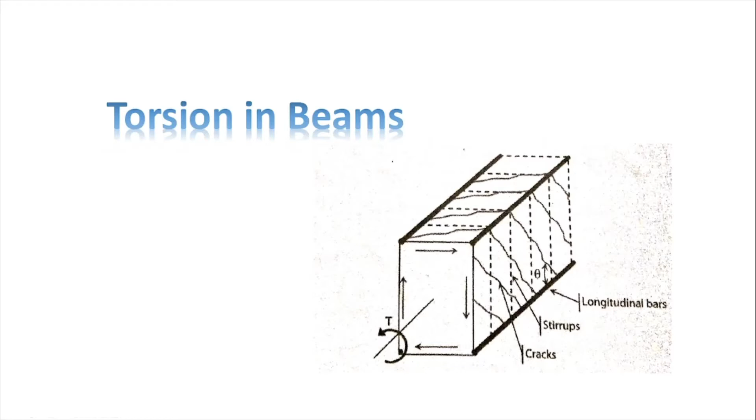So the analysis will differ with respect to each type of moment. Now our concern is the torsional moment. So how do we design the beam to resist that kind of load or moment? But first, what actually causes torsional moment?

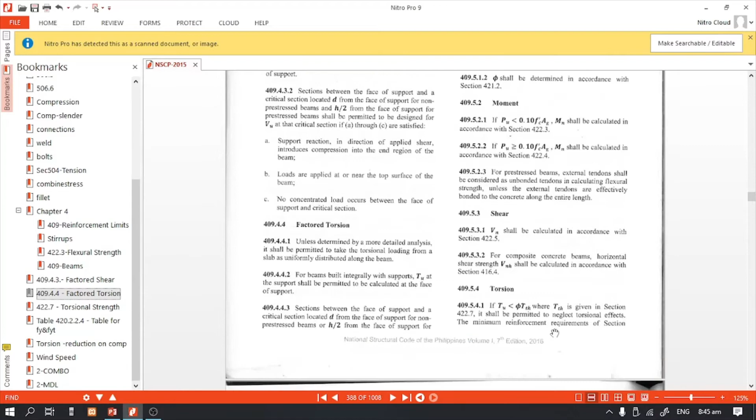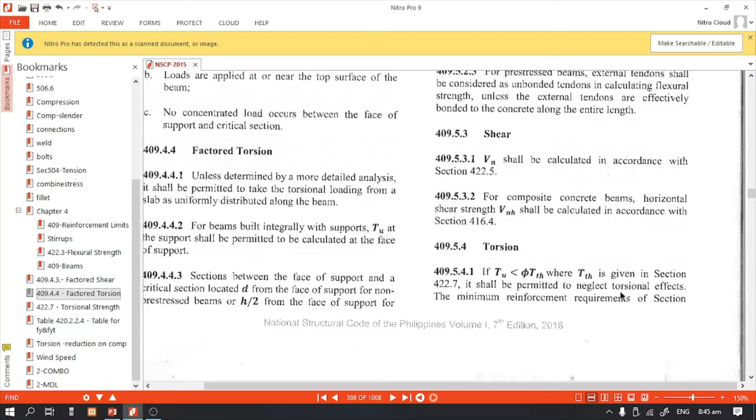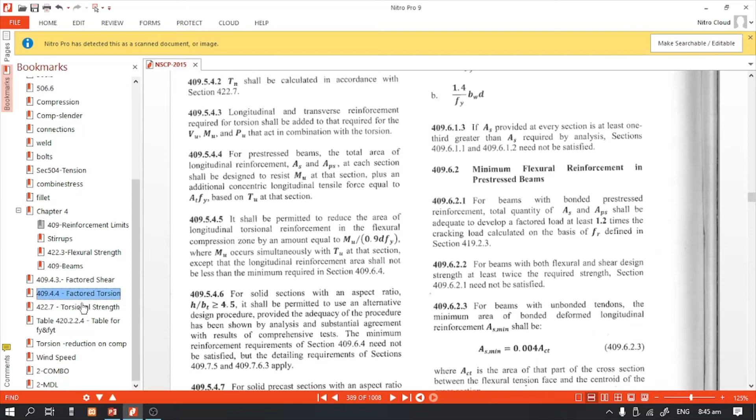So what's in the yellow box? According to the NSCP, if our torsion is less than phi T sub TH, it shall be permitted to neglect torsional effects. So what is T sub TH? It's the threshold torsion, TTH.

So for non-prestressed members, this is the formula: 0.083 lambda square root of f prime c, times A sub cp squared divided by p. If you notice, the difference here is the use of 1 over 12. Our 1 over 12 is also equivalent to 0.083, so to be more precise, let's just use 1 over 12.

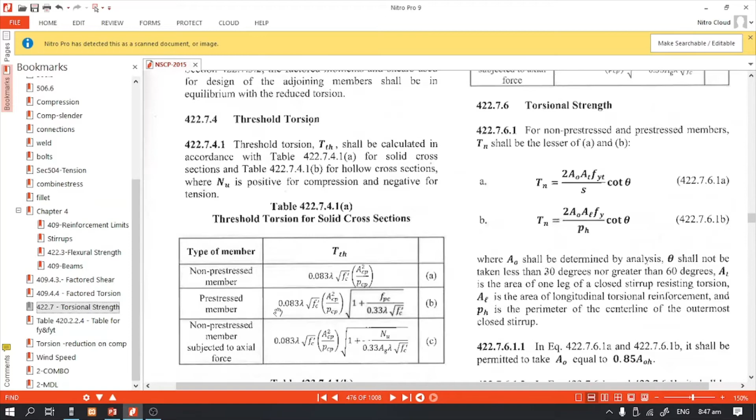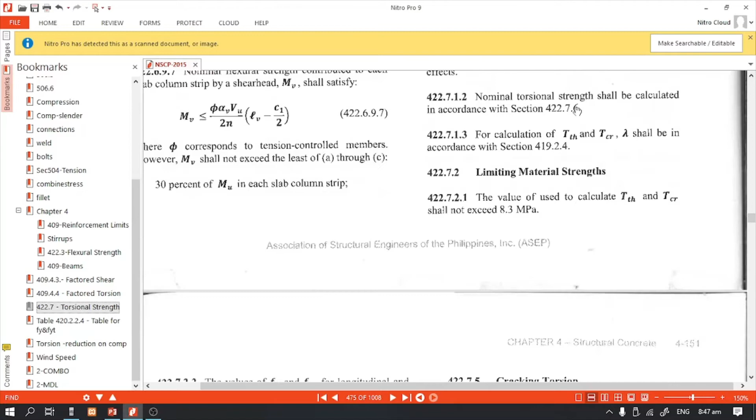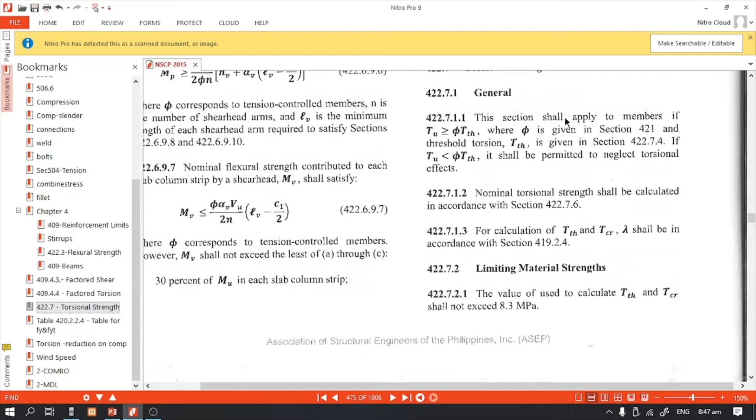So that's why we simplified the equation like this. According to NSCP, based on section 422.7.1, if we compare it to the value of the threshold torsion, if it's less than that, it shall be permitted to neglect torsional effects. But if it's greater than that value, then this section shall apply to the design of the member. That's shown in the diagram.

So if it's less than 1/12 of this term, torsion reinforcement is not necessary.

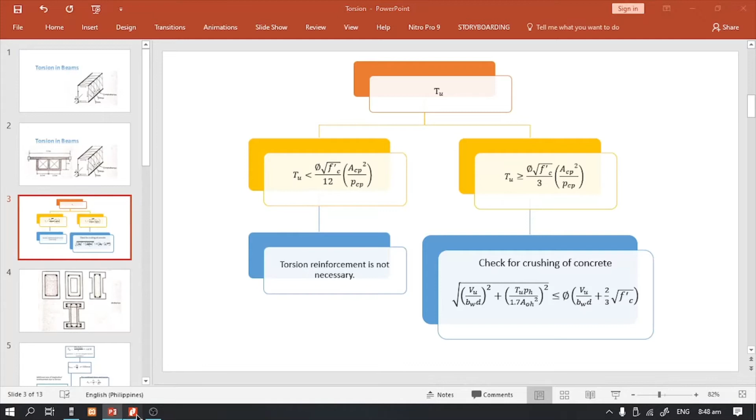Now when it comes to our design, we have another parameter, which is phi multiplied by T sub CR. T sub CR is what we call the cracking torsion. This value is what we'll base our design on.

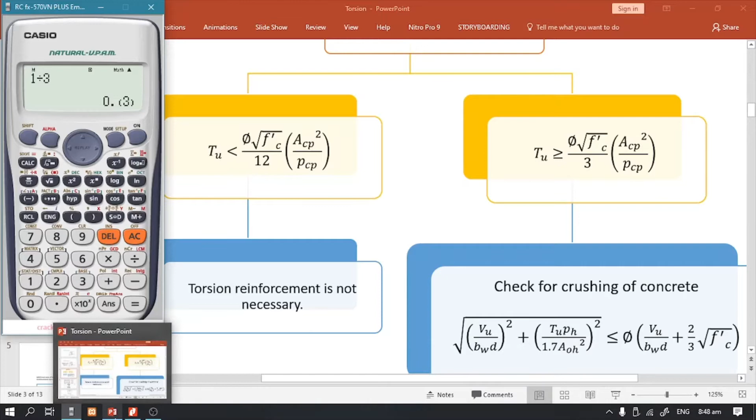If it's greater than phi multiplied by T sub CR, and TU is required to maintain equilibrium, and the member shall be designed to resist T sub U. So if the value of TU is larger than that, we need to design it for torsion.

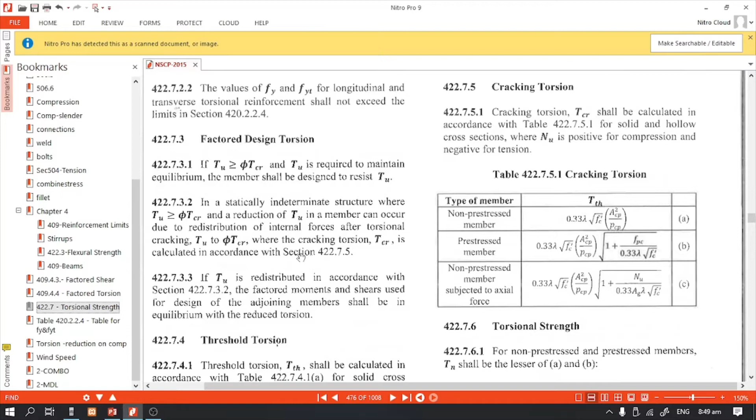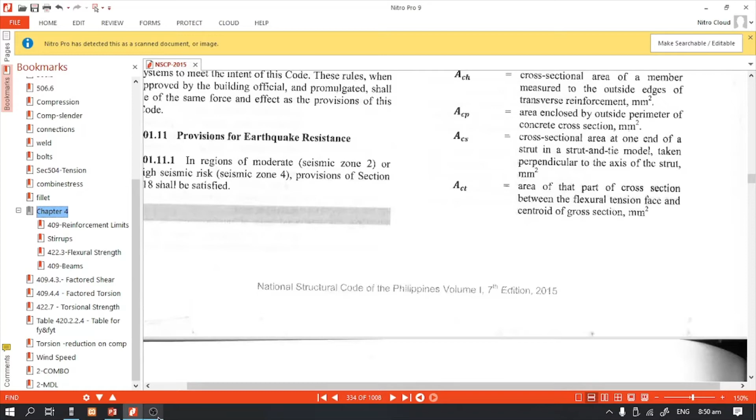So let's proceed to the formulas. What are the new notations here? A sub CP, as defined in the NSCP, A sub CP is the area enclosed by the outside perimeter of the concrete cross section. If we examine this, our A sub CP is basically the gross cross section, that is BW times H, our overall depth.

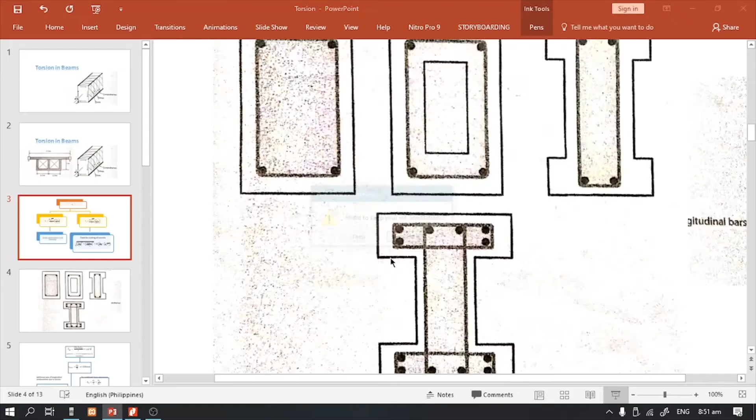So yung PCP naman natin is the perimeter, at yung ACP is the area. So halimbawa, na-compute natin na yung value ng Tu natin ay greater than the value ng TCR.

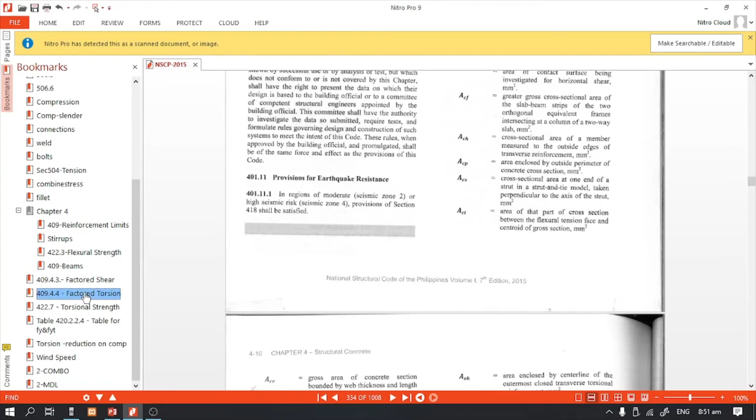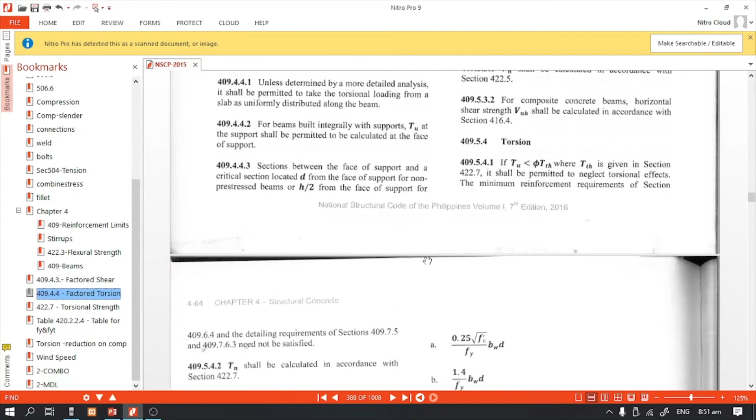Anong unang gagawin natin? Check for crushing of concrete. Sabi kasi dito ni NSCP, bago natin i-design yung member natin for torsion, kailangan nating i-check yung capacity ng section natin. So may limiting values dito.

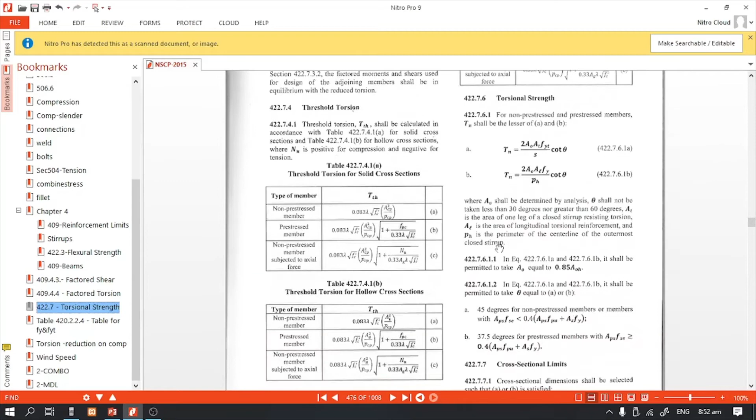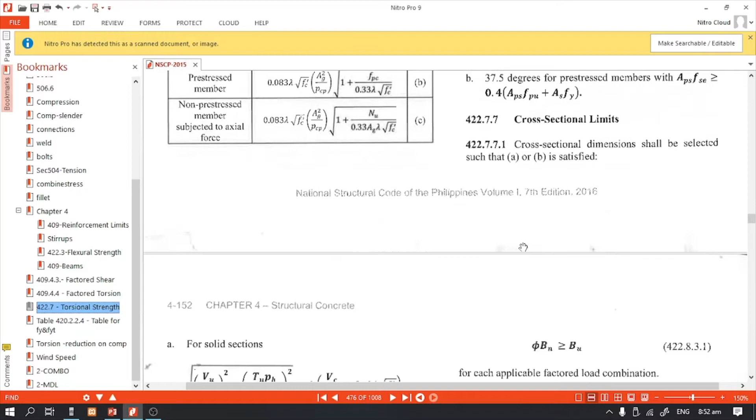Sabi dito sa section 422.7.7, dito papasok yung cross-sectional limit. Kapag nasatisfy niya itong condition na ito, saka lang tayo pwede mag-proceed sa pagde-design ng torsion.

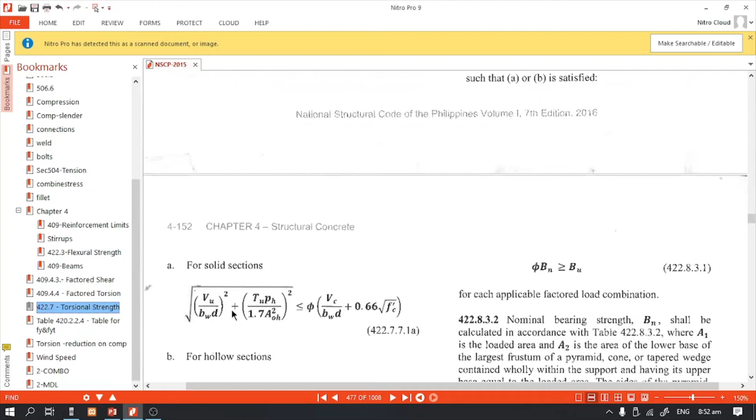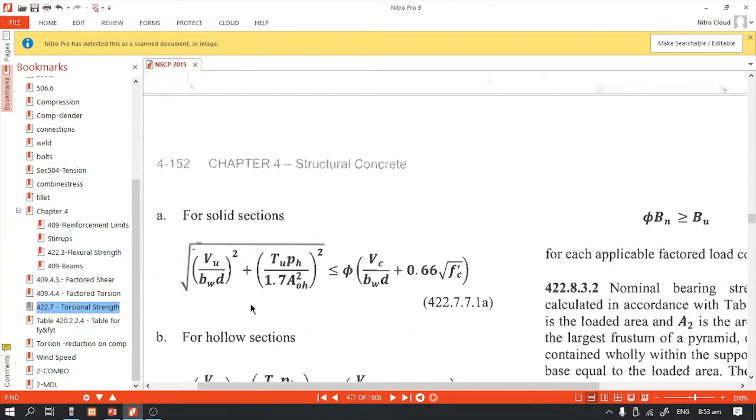However, kapag hindi na-satisfy itong condition na ito, possible na magkaroon ng crushing of concrete. Na kahit dinesign mo siya, meron siyang torsional reinforcement, pero ang bibigay na mismo is si concrete. Kahit mag-provide ka ng mga bakal, kung ang unang bumigay ay si concrete, walang saysay yung mga bakal mo. Para maiwasan iyon, kailangan i-check niyo muna yung section niyo kung enough ba.

So ito yung gagamitin nating formula to check for the crushing of concrete. VU is the factored shear, ito yung dati nating ginagamit—kung ilan yung value ng shear natin at critical section.

Yung TU pala natin, saan nga ba siya kinukuha? Kung babalikan natin dito sa NSCP, same lang siya ng pagkuha ng VU. Sabi dito, for beams built integrally with supports, TU at the support shall be permitted to be calculated at the face of support. Same ito sa VU natin. Kapag naman yung section natin ay between the face of the support and the critical section located D from the face of support, for non-prestressed members.

Kapag hindi siya built integrally, yung beam natin, yung critical section natin ay located at a D distance from the face of support. So same lang siya ng location ng sa VU.

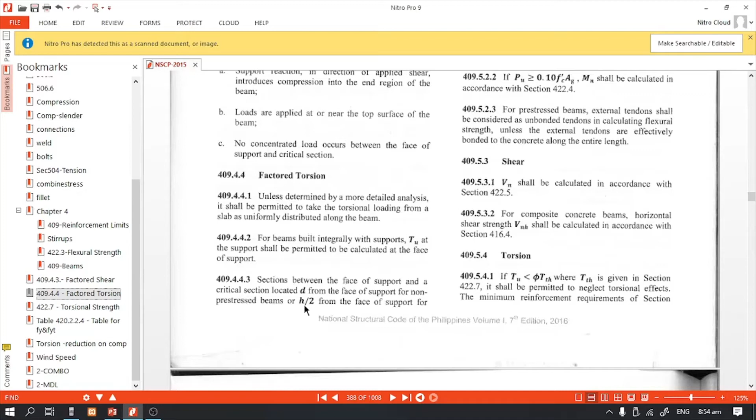Balik tayo dito sa formula: TU, and then P sub H at A sub OH. Ito yung bagong dalawang variable natin. Paano ba kino-compute si A sub OH at P sub H? Yung A sub OH is the area enclosed ng outer center line ng transverse reinforcement natin. Ano ba ibig sabihin nun?

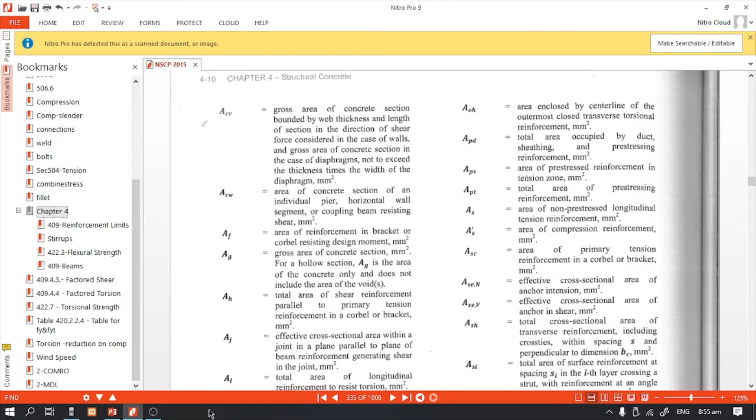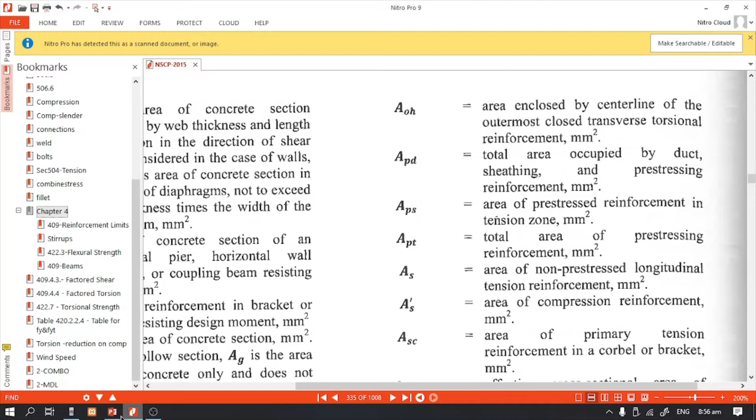Yung definition ng NSCP, A sub OH is the area enclosed by center line of the outermost closed transverse torsional reinforcement. Halimbawa, ito yung mga stirrups natin. Ang kino-consider natin dito na area ay yung area enclosed ng outer na transverse reinforcement natin. Kukunin natin yung center line ng transverse reinforcement natin, tapos yun na yung makokompute natin na area.

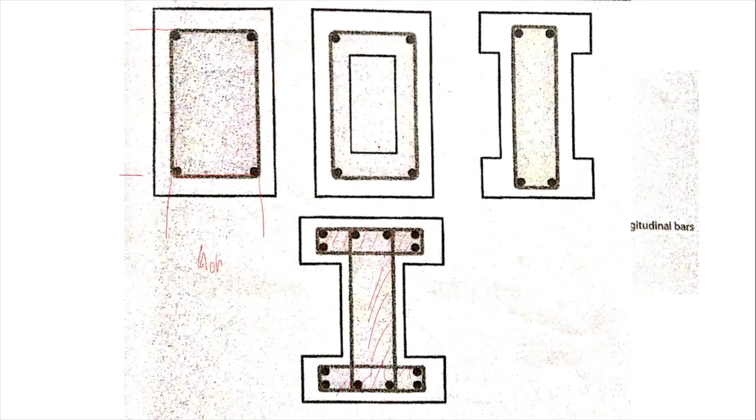Dito, kumbaga, ito yung mga shaded portion—ito yung A sub OH natin. Minimeasure siya doon sa center line, center to center ng mga enclosed area ng reinforcement natin. Ito yung itsura niya, ang shaded portion niya. Yung P sub H natin is the perimeter lang naman ng kinonsider nating area for OH.

Mamaya, mas magiging clear sa inyo yung pagkuha nito sa sample problem natin. So after na ma-check niyo for crushing, let's say, pag nasatisfy niya ito, ibig sabihin magpo-proceed na tayo doon sa pagde-design ng torsional reinforcement. Ito na yung formula natin.

Yung Tn ay manggagaling doon sa value ng Tu divided by the reduction factor phi. Yung phi natin dito ay same, yung same value na ginagamit natin for shear—iisa lang ito para sa shear at torsion. Yung formula natin, Tn is equal to... wala pala itong minus.

Ito yung formula natin: Tn is equal to 2 A sub O times A sub T times FYT over S times cotangent theta. Ano ba yung cotangent theta dito? Sabi dito, yung theta ay equivalent to 45 degrees for non-prestressed members. Ito muna yung gagamitin natin dahil non-prestressed members ang dinidealan muna natin.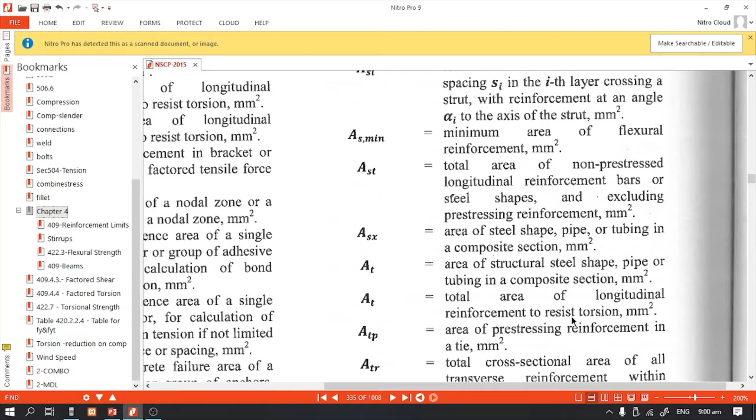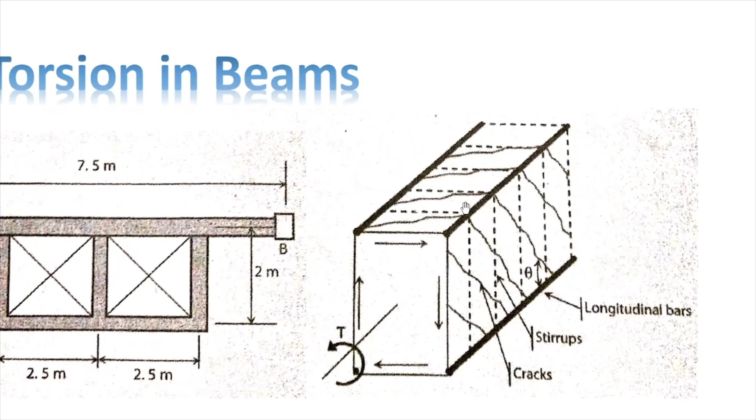So, kasi dito, para daw ma-resist yung torsion, pwera dun sa ilalagay nating transverse reinforcement. So, 'di ba ang tinatawag nating transverse reinforcement is itong mga stirrups. Ito. Yan. Pwera dyan, yung sa torsional reinforcement natin, nagre-require din siya ng longitudinal reinforcement, additional longitudinal bars.

So, meron din siyang nire-require na ganito, itong mga bars na to, sa torsional. So, kaya, yung A sub T natin, yun yung longitudinal bars. So, mamaya, mas magiging clear yun sa pag-solve natin.

So, halimbawa, using this equation, di ba may given na tayong Tn, given na din tayong A sub O. Ang makukuha natin dito is the spacing. So, pag nakuha natin yung required spacing for the torsional reinforcement, i-compare natin siya dun sa S-max. Yung maximum spacing in terms ng sa torsional, meron tayong value na P sub H divided by 8 or 800 mm. So, kung alin doon yung mas mababa, yun yung mas mag-govern.

So, ito, proceed naman tayo dito sa for combined shear and torsion. So, pagsasamahin na natin yung required shear and torsion reinforcement. So, paano ba i-determine yon?

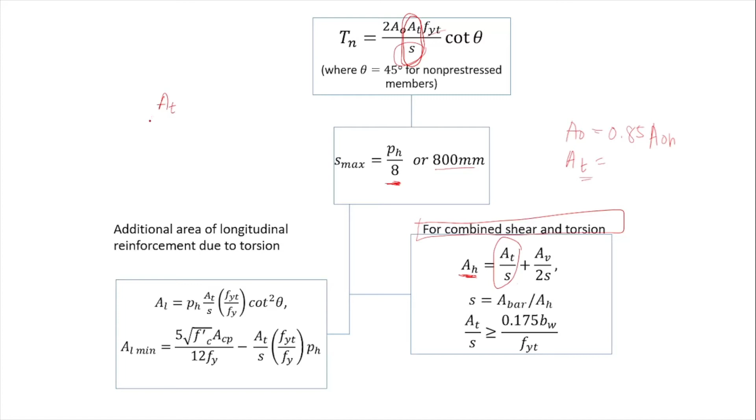So, dito, yung A sub H natin, it denotes, it refers to the total reinforcement area nung bar na required for combined shear and torsion na. So, A sub H is equivalent to A sub T over S plus A sub V over 2S. So, ito, yung A sub T over S, dito siya manggagaling sa equation natin to. Kumbaga, ito yung area nung sa torsional reinforcement natin sa kada spacing, tas ipa-plus pa natin yung nire-require na area ng bar for shear naman.

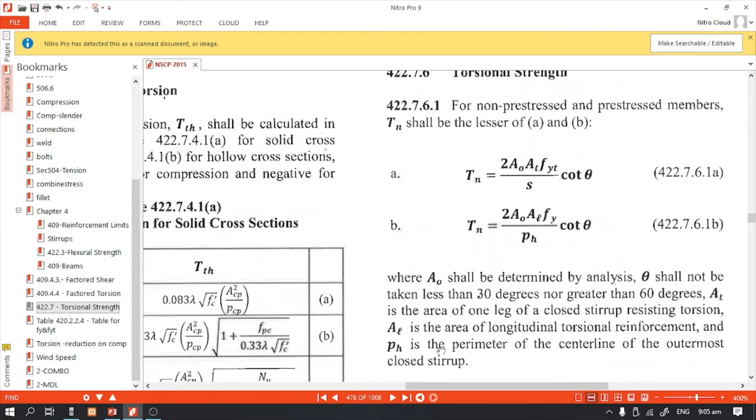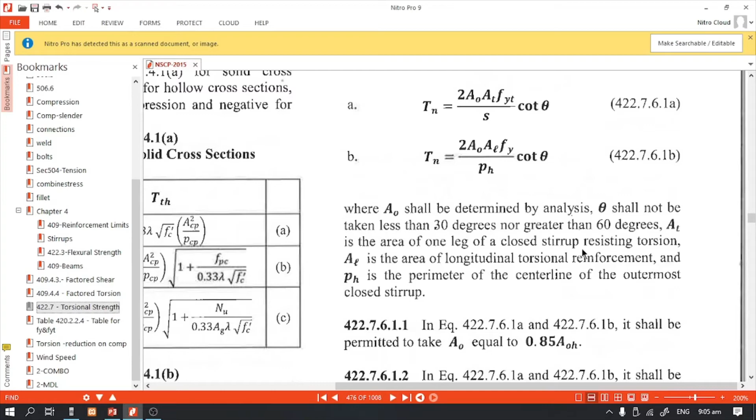Yung A sub L pala, yung definition niya dito sa NSCP, yung A sub T natin is the area of one leg na medyo na nagkaiba pala yung binanggit ko kaninang definition ng A sub T. Yung A sub L yata yung nakita ko kanina pag-define. So, kaya ang naging definition natin ng A sub T kanina is longitudinal torsional reinforcement. So, ang tama is, yung A sub T natin is the area of one leg of a closed stirrup resisting torsion. So, yung transverse reinforcement pa rin itong si A sub T.

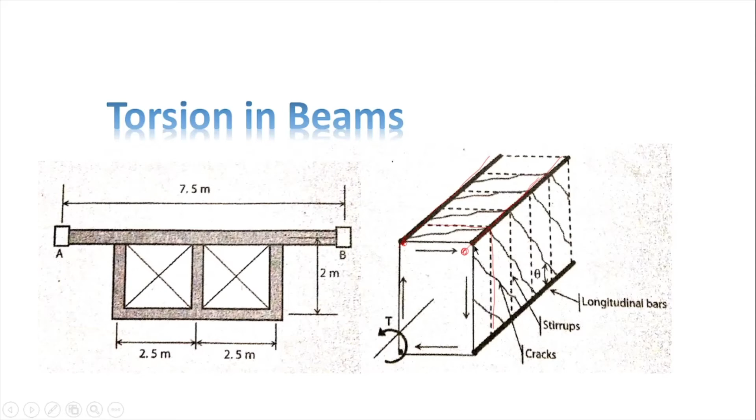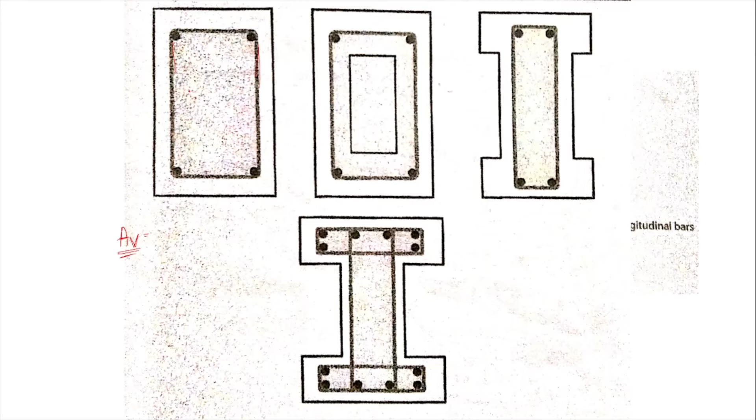So, bakit kaya yung A sub V natin dito is may over 2? Kasi daw dito, kung mapapansin natin, sa pagkuha natin nung sa shear, ang kino-consider nating area nung bakal na nagre-resist, na tumutulong para ma-resist yung shear is yung area na parallel dun sa force, 'di ba? Ito yung sa shear force. Kaya dito, itong areang to, yung kino-consider nating area for shear. So that is 2 times the area nung bar natin.

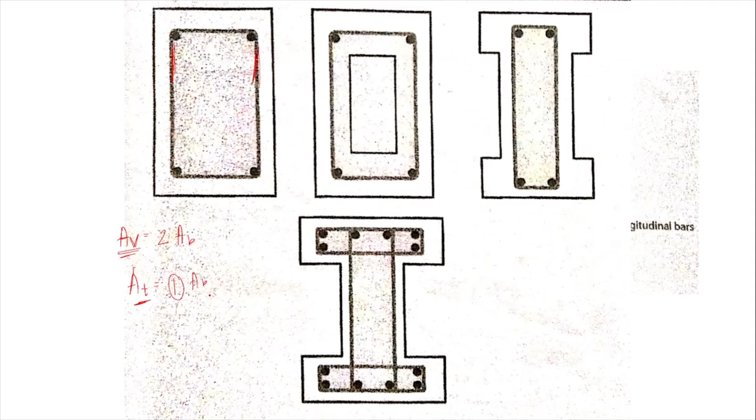However, pagdating naman kay A sub T, yung sa torsional reinforcement, since twisting moment yung nire-resist niya, itong kabuuang ito, ang nagre-resist lang dyan nung torsional moment is considered as 1 lang. Isang area lang nung bar natin. Kasi, twisting moment, so, ang magre-resist lang yan is isa lang. Isang area lang. So, ito lang yan.

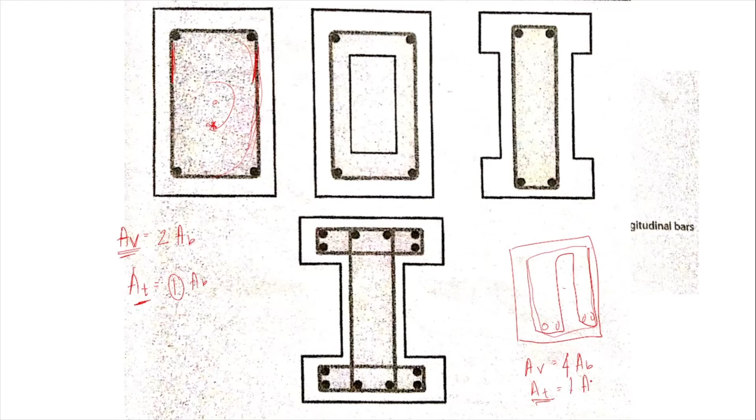Isahan na yon. So, halimbawa, kung may mga example tayo na yung sa shear na ganito yung itsura nung stirrup. So, dito, ang area natin for shear, bali 4 na diameter. 4 na area nung bar. However, kapag kay A sub T ulit, ang nagre-resist lang dyan is yung nasa outer. So, ang consideration pa rin yan, isang area lang nung bar. 1AB lang.

Kaya, pag-solve natin nung required reinforcement for combined shear and torsion, dinidivide natin by 2 yung area nung sa shear reinforcement since ang consideration dito is per one leg of stirrups. So, ang kino-consider natin dito, one leg of stirrups lang. Kaya, dinidivide natin to by 2. So, dito, makukuha na natin yung spacing.

So, pag pinag-add nyo yun, makukuha natin yung spacing. So, kunin lang natin yung gagamitin nating area nung bar. I-divide lang natin dun sa nakuha nating value ng AH dito. So, ito na yung magiging pinaka-spacing natin. Kasi dito, magkaiba pa yung spacing na nakuha natin in terms ng sa shear, in terms ng sa torsion. So, ngayon, pinagsama na. So, iisa na yung ibibigay niyang spacing for combined shear and torsion.

So, wherein, may limitation dito. Yung value daw ng A sub T over S is dapat daw greater than or equal to 0.175 BWFYT.

So, ayun yun. Pagdating naman dun sa additional area of longitudinal reinforcement due to torsion, ito naman yung gagamitin nating computation. So, same lang yung mga gagamitin natin tong values, so, theta is equivalent to 45 degrees. Tapos, pag nakuha natin yung value na to, i-compare lang natin ulit dun sa minimum value niya. And that is equal to this value.

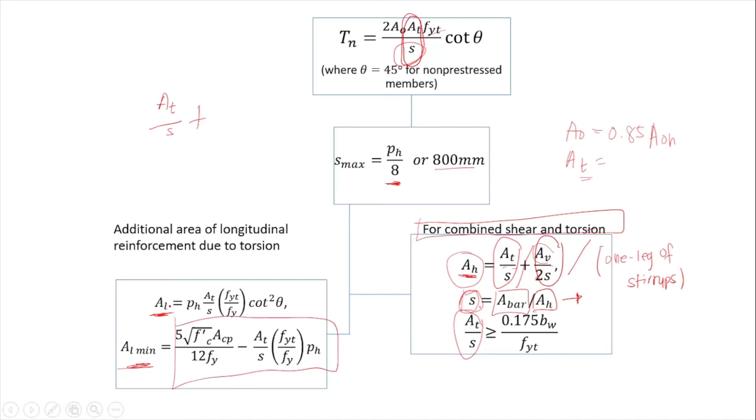So, let us try now a sample problem. So, ito din yung pinakita kong figure kanina. So, given na yung mga factored moment, yung shear, and torque. So, hindi na tayo magko-compute.

Ayan. So, MU is equivalent to 440 kilonewton meter, VU is 220 kilonewton, and torsional moment is equivalent to 50 kilonewton meter. So, yung description dito, the girder has a width of 400 mm and an overall depth of 500 millimeter. So yun yung property ng beam natin.

So, yung concrete cover is 40 mm. Nabanggit ko na to si concrete cover. Ano po? Kapag sinabing concrete cover, ang measurement niyan, simula dun sa outer bar, papunta dun sa outermost or extreme concrete fiber natin. So ito yon yung 40. And then, the centroid of longitudinal bars of the girder are placed 65 mm from the extreme concrete fiber. So yung centroid ng bar natin is 65 mm from the extreme concrete fiber.

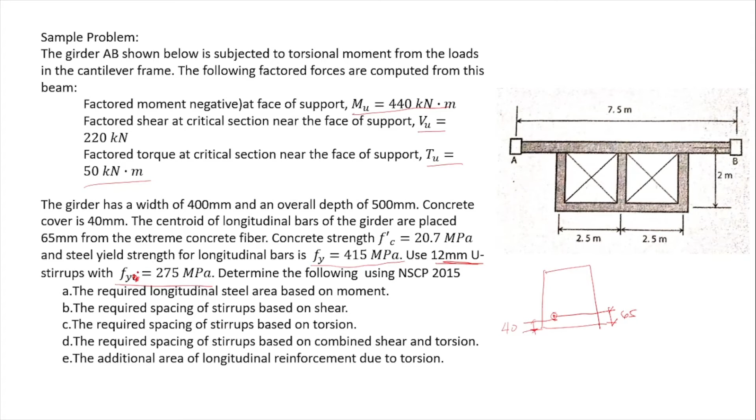So, concrete strength is F prime C equal to 20.7 megapascal, and then the yield strength for longitudinal bars is Fy. Nabanggit na din naman dito kung anong bar diameter na gagamitin nating stirrup, that is 12 mm, and yung yield strength niya is 275 megapascal. So tandaan, laging mas mataas yung yield strength na ginagamit for longitudinal bars kesa dun sa mga transverse reinforcement natin or the stirrups.

So wag kayong malilito, no? Kung sabihin parehong Fy yung binigay dito, hindi niya in-indicate, in-specify na Fyt to. Ang i-consider yung Fyt is lagi yung Fy ni stirrups.

So sabi dito, determine the following using NSCP 2015. Nakalagay dito, required longitudinal steel area based on moment, spacing of stirrups based on shear, torsion, tapos sa letter D, combined shear and torsion, and letter E, the additional area of longitudinal reinforcement due to torsion.

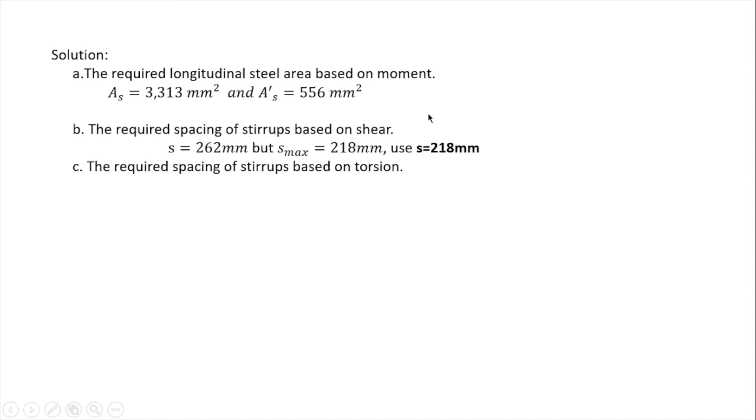So yung solution dun sa pang A at B, hindi ko na ipapakita. Basta may nakuha na tayong AS and A prime S. Ibig sabihin, doubly reinforced yung beam natin. At kung aanuhin natin, andito si AS, A prime S, and andito si AS.

Bakit ganyan yung orientation natin? Kasi 'di ba sabi dun is negative moment. Nakalagay dito, yung factored moment natin is negative. Ibig sabihin, ang itsura niya ganito: yung beam natin is tension sa taas and compression sa ilalim. So kaya, nagpalitan ngayon yung location ni AS tas ni A'S.

So yung na-solve din dito na required spacing for stirrups based on shear is equivalent to 262. Pero yung computation ng maximum spacing is 218. Therefore, ang mag-govern dun is 218 mm na spacing.

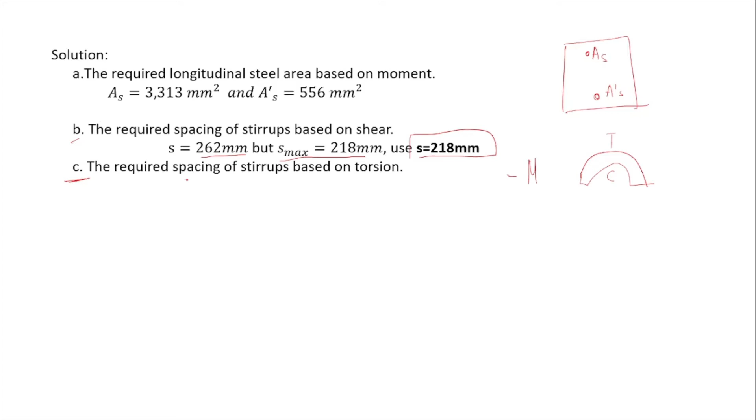So dito na tayo mag-start sa required spacing of stirrups based on torsion. 'Di ba may given na 50 kilonewton meter? So alamin muna natin kung negligible, pwede ba nating i-neglect yung torsional moment or hindi. So i-compute natin yung value ng T sub TH or the threshold torsion.

So yung base sa computation, yung ACP natin, that is the gross section nung concrete section natin ng beam. So that is equivalent to 400 times 500, di ba yung overall depth kanina sinabi na 500. And then ano yung PCP? Yung perimeter, so dalawang 400 plus dalawang 500, that is 1800. So substitute lang natin sa formula. This is equivalent to 6.319 kilonewton meter.

So dito, yung unit kasi dito, naka-Newton mm siya. So kapag dinivide natin siya by 1 million, 1 times 10 raised to 6, para maging kilonewton meter. So since TU, yung TU natin na 50 kilonewton meter is greater than our T sub TH, therefore torsion reinforcement is necessary. So papasok na yung pag-check natin for crushing of concrete.

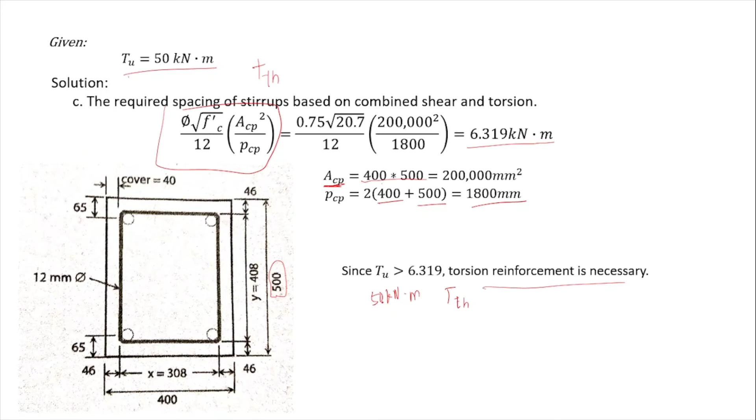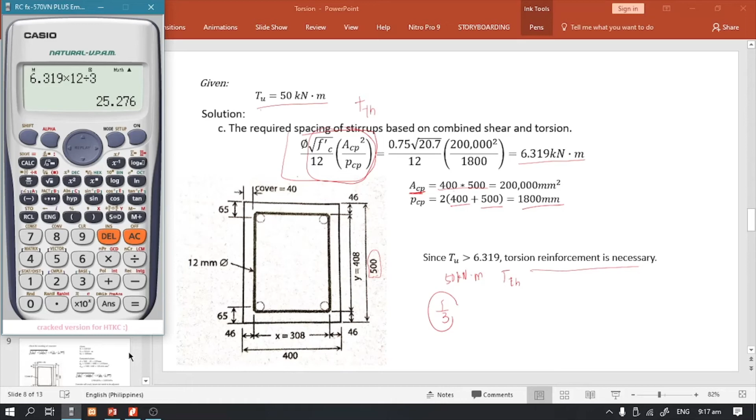Before that, 'di ba, i-check natin siya dun sa value na 1/3 nitong value na to. So para makuha natin yung value na yun, edi i-check lang din natin ulit si 6.319. Edi ganito, 6.319, multiply ko lang siya by 12, tas i-divide ko siya by 3. Kumbaga naging times 4 lang para maging 1/3 na to. So that is 25.28.

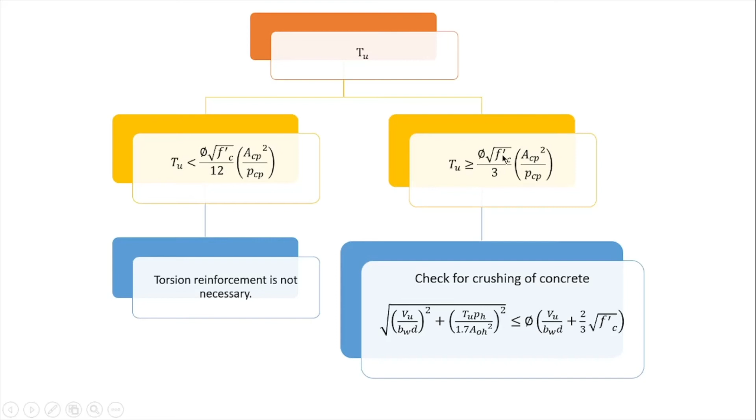Kasi nga 'di ba dun sa dito, 1/3 na yung pagkukumparahan natin. Hindi na 1/12. Since nag-greater than siya sa 1/12, so ang another checking natin kung lalagpas siya dun sa 1/3 ng value nito. Kaya yun yung naging equation natin. So 25 point something yung value niya. So greater than pa rin. So kailangan pa rin natin i-design.

So magpo-proceed na tayo ngayon dun sa checking for the concrete, crushing of concrete, ano? So ito yung formula natin. So ito yung mga given values. So pinakita ko din dito yung computed values.

So yung value ng D natin is, binanggit na doon na at a distance of 65 mm yung distance. So ibig sabihin yung 500, i-minus lang natin ng 65, so that is 435 mm. So yung 65 mm at both sides yon for compression and tension. Since ang nakalagay naman niya dito, sabi niya dito, centroid of longitudinal bars of the girder, hindi naman niya sinabing for ano lang, for tension or compression.

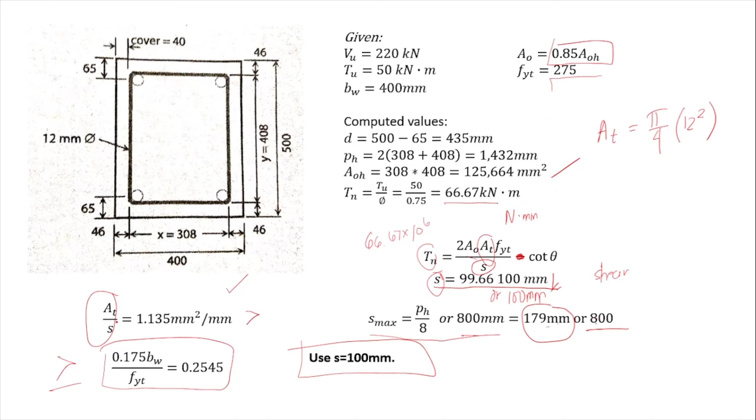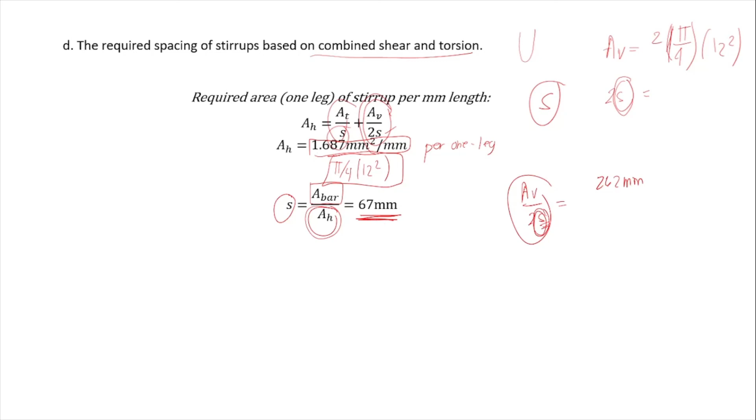Dito, A sub T over S, ito yung na-compute natin dito sa slide na to, 1.135. So yung total AH natin ay 1.687 mm squared per mm. Para makuha natin yung required spacing of stirrups based on combined shear and torsion, yung area ng bar na gagamitin natin, pi over 4 times 12 squared, i-divide natin by the AH. Since ito ay per one leg, isang area lang ang ginagamit natin, area lang ng bar. So yun, yung required spacing ay 67 mm. Yun na yun, yung sagot doon.

So for letter E, the additional area of longitudinal reinforcement due to torsion. Since meron na tayong computed na area for tension, area for compression reinforcement, magdadagdag tayo dito ng additional longitudinal reinforcement due to torsion. Ito yung magiging computation.

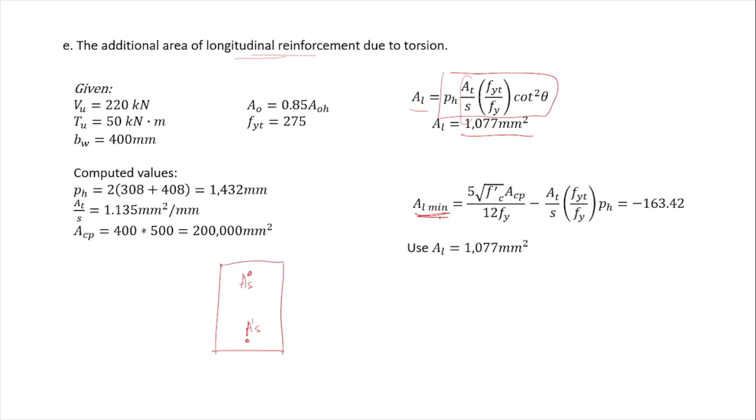A sub L is equivalent to this value, computed value na din to. So we have 1,077 mm squared. I-compare lang natin doon sa minimum value na negative pa yung minimum dito, kaya ang mag-govern ay si AL na 1,077 mm squared.

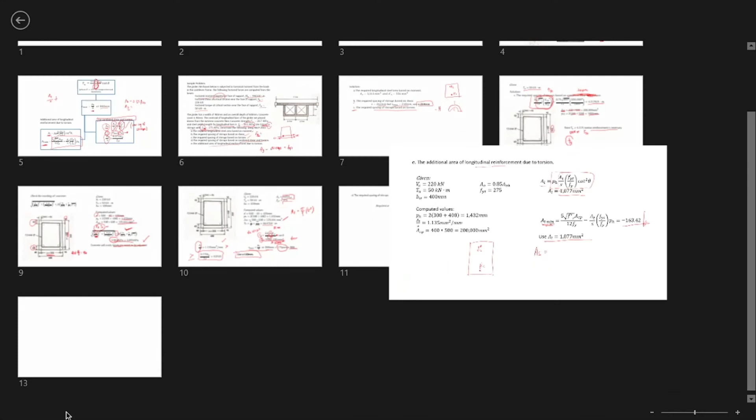Ibig sabihin, may computed value tayo ditong AS. Yung AS natin kanina ay 3,313, tas yung 556. Ibig sabihin, yung sa AS natin na 3,313, mag-a-add tayo ng 1,077 doon.

Um, hindi pala ganun, hindi siya plus 1,000. Wait lang. Hindi siya basta-basta ipa-plus mo sa kabuuan na 1,077. Kasi yung 1,077 na additional longitudinal reinforcement ay para sa kabuuan na yun.

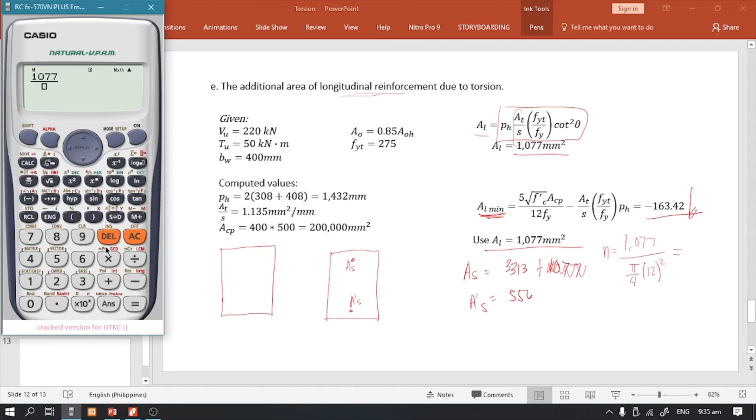Let's say meron tayong section, kunwari yung beam natin. Yung computed additional longitudinal reinforcement natin ay 1,077. Alamin natin yung number of bars ngayon. Ibig sabihin yung 1,077 natin, i-divide lang natin by pi over 4 times 12 squared. Kapag kinompute natin to, i-divide natin 1,077 sa answer, ayan 9.52, ibig sabihin 10 bars, 12 mm diameter bar, yung additional longitudinal reinforcement na kakailanganin.

Kung i-distribute natin siya, ito yung use stirrup natin. Ibig sabihin yung 10 bars, para ma-distribute siya equally, pwedeng ganito yung maging distribution niya. May existing na tayong AS and A prime S, let's say may computed tayong value ni AS and A prime S. Ngayon pwedeng i-combine na lang natin yun.

Let's say yung kay AS ay 3313, ipa-plus na lang natin dito yung tatlong diameter bar na 12 squared. Kapag meron na tayong value nun, let's say ang kinalabasan ay 7-28 mm diameter bar, meron tayo ditong 7 diameter bar. Ayan, pwedeng combined na sila, pwedeng ganyan.

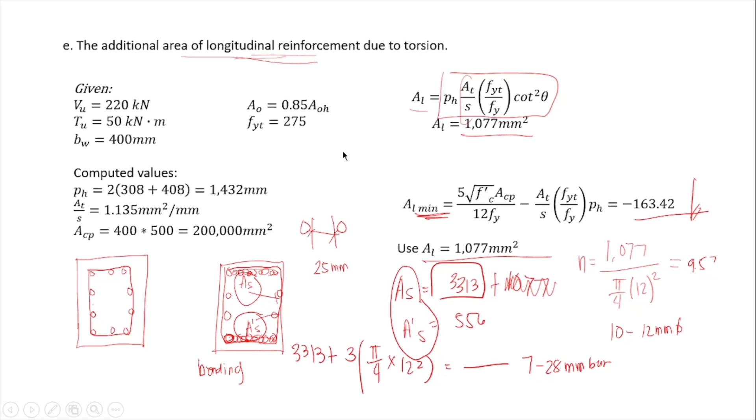Yun ay yung clear spacing ay 25 mm based sa NSCP. Kaya ang concept, pagko-combine mo, yung additional longitudinal reinforcement doon sa existing na main longitudinal reinforcement mo para sa flexural. Ganun lang naman yung sa design for torsion. So that's all. Thank you.